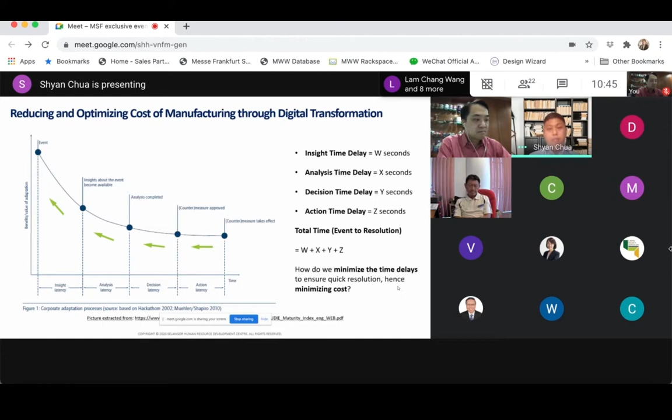Now the key question is, how are you going to integrate from the bottom level, the base, all the way to the ERP? This is a key importance for everyone to understand, because most of the time, what I understood from many industries is they start from the top and then have difficulty connecting to the bottom. So that is one of the challenges that I see.

Most of the time, people start off at the top first. But rather, we should actually look at it from the base level, what you want to achieve, and then slowly move up to the top.

And how that interconnection works is actually through what are the flexible and modular approaches to connect everything together. So we talk about how the smart factory ecosystem should be modular and flexible enough for industries to integrate.

You talk about Lego, right? You start from Lego pieces and then you connect them, and slowly you build them into what we call a masterpiece. The same thing can happen for many industries as well. You start with pieces, connect them together, and once you connect all the way to the top, you build your pyramid, and eventually you have a masterpiece of a smart factory on your own.

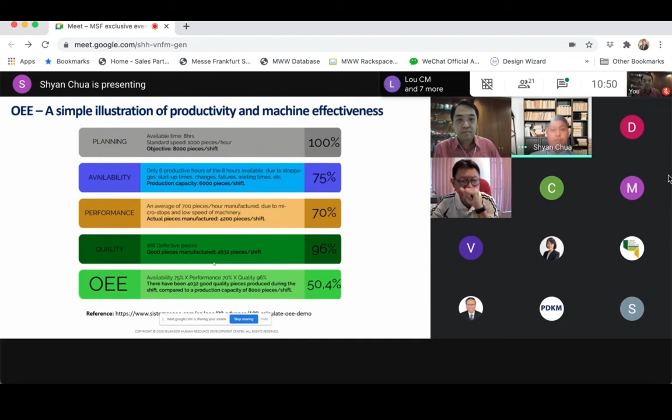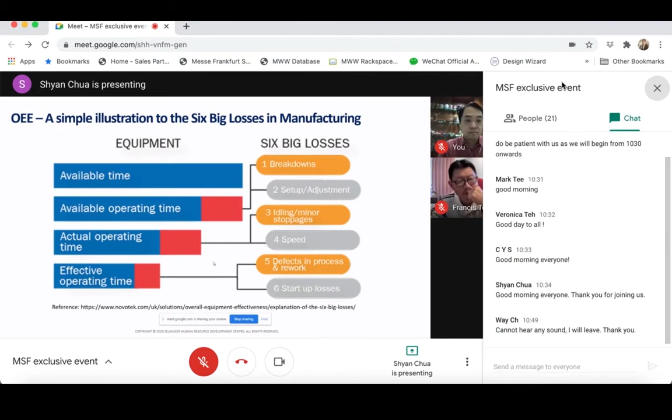So then we talk about the illustration of the 6 big losses in manufacturing. We talk about the 6 big losses, which are breakdowns, setup adjustments, idling or minor stoppages, speed, defects in process and rework. Then you talk about the startup losses and so on. So all these things basically produce what we call your 6 big losses.

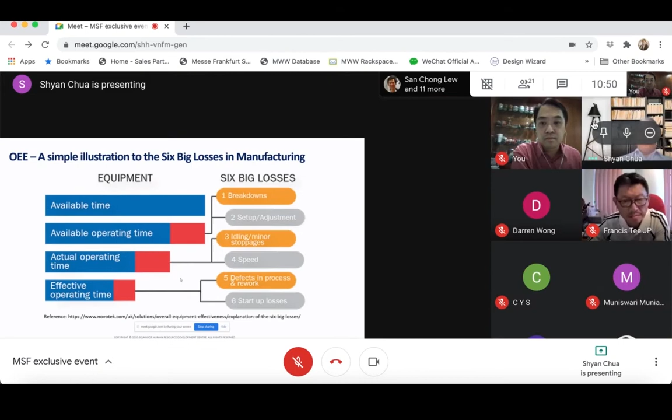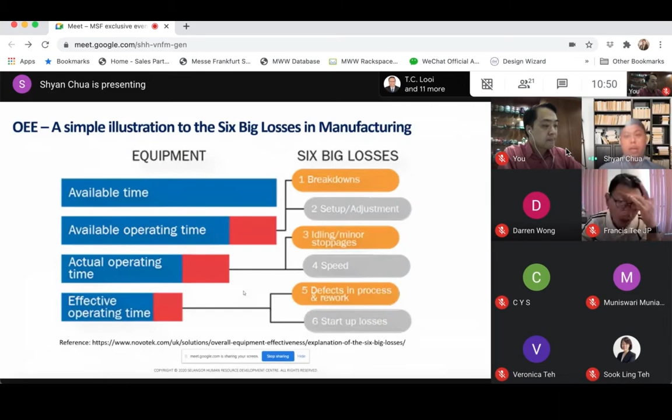And all this identification of your 6 big losses can be achieved from understanding your current manufacturing operations. This can be achieved through getting your data, and then you can actually see where all these losses are at. And then from there, you can identify your unplanned stops, your small stops, your production rejects, and all this can actually be achieved in real time so that you can get the right mitigation steps in place before something bad actually happens.

So now, then we think about the overall OEE. How straightforward can it be to actually be able to collect that kind of information from machines? So most of you would probably have machines with tower lights, with emergency stop, start-stop button. You have sensors that will identify your part in and part out. But maybe these machines are at the moment not connected. So then we talk about how do we then collect the data to actually visualize this kind of information.

So we talk about availability, performance, and quality. From a machine, how do you identify how to get availability data? A simple approach would be tower lights, emergency stop, or start or stop button. You can actually tap signals in a machine to give you that information of your downtime. For example, if you have a red light in your machine, basically your machine is down. So then you can calculate your downtime, and once you calculate your downtime, you can calculate your overall availability.

So then you talk about your performance, which means your part in to part out, which is your cycle time, your process cycle time. So you just have to tap signals from input to output - how many cycles your machine has run, and what's the time difference between cycles. That is your overall performance.

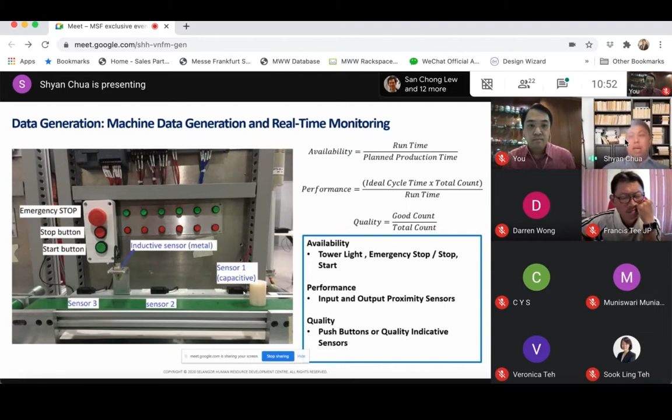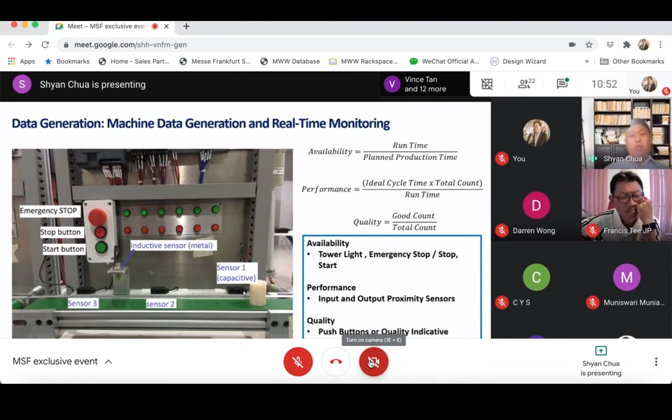Is it either operator dependent, or machine dependent, or is the startup time taking too long? Then we are able to identify, right? We can take action almost immediately because this is real-time data.

Then we talk about performance. Let's say my performance has dropped to 50%, halfway through my production shift. Then I can understand that my production is having this issue because maybe my conveyor belt has a problem, or maybe my system has a problem, my hydraulic press has a problem, maybe, right?

All these things we need to identify through data collection. Then we talk about quality. Let's say operator A, in his shift, his quality is 90%. Operator B, his shift, the quality dropped to 50%. So this kind of quality issue can be operator dependent. Or let's say today you use raw material from company A, and you achieve 90% quality. Tomorrow you use raw material from company B, suddenly your quality dropped to 50%. Now that is basically quality dependent on raw materials.

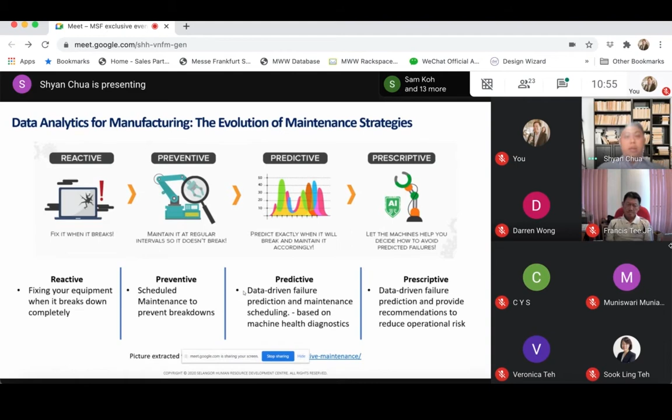Now, the whole idea of data is basically helping you to make decisions early before it actually reaches a functional failure. By having operational technologies in place, you can monitor your machine health over time, so that you prevent it from only mitigating the steps at the functional failure stage, but you're actually able to solve it preventively at the early stage, through the predictive maintenance kind of strategy.

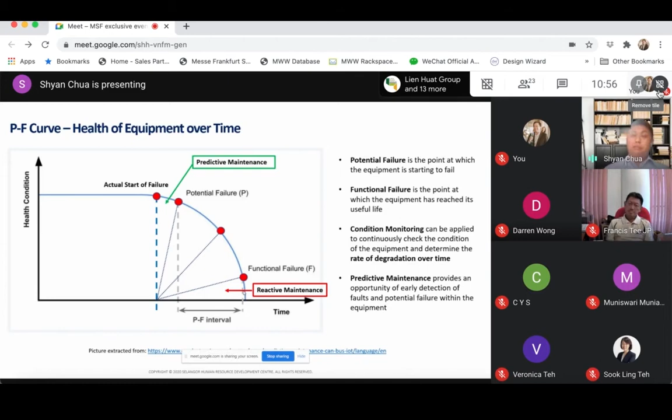And these are data-driven strategies to help you make decisions faster. If, by data, you can understand the machine better and understand the root cause, you make decisions faster. Therefore, you get your machine up at a faster rate.

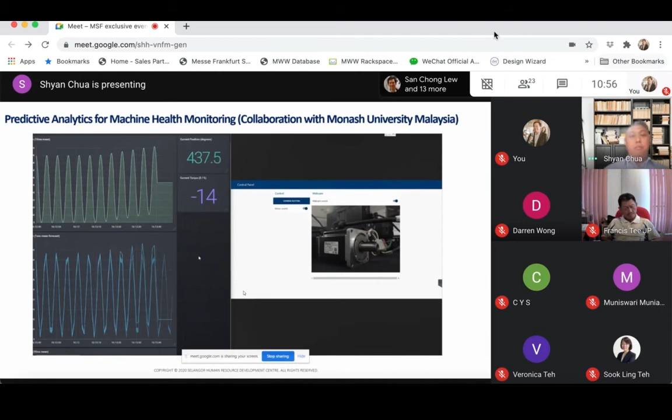So when you have a lot of data, you can also identify what is happening in your machine. We talk about anomaly detection. Sometimes when your conveyor is having a problem, eventually you can predict this faster. Or let's say if you have a certain oil leak in your oil tank for your hydraulic press machine, you are able to understand what is the level of the oil, when to actually change or top up your oil. So these are what we call anomaly detection.

So the whole key idea about operational technologies is how do you integrate these technologies to give you the data that you need. It's not just any data, it's about the volume of data, how big you want your data to be; velocity, which is your frequency—it cannot be every 1 to 2 days you collect data, it needs to be a certain time scale depending on your system; and variety—you don't just collect one signal, you collect many.

And then veracity, which is your accuracy of data. Now, accuracy of data is very important, because sometimes people say, oh, I have a supervisor that every morning will collect data from 40 over machines. What is the data accuracy of that data collection? Does anyone know?

If there is some tampering or non-transparency in the data collected, we will never know. So automating data collection will create value and useful data for management to observe, and by doing this you actually reduce your total losses.

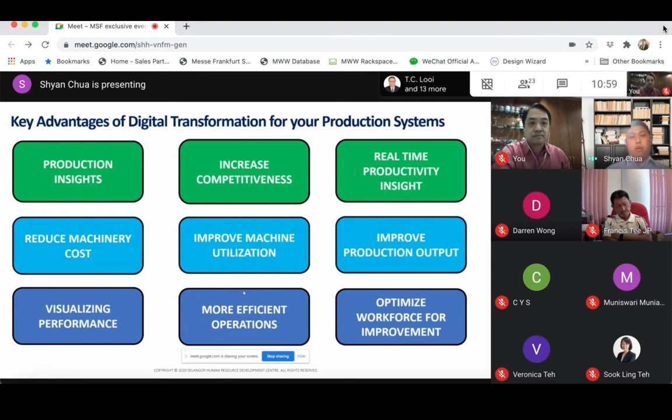Right now, if it's an MCO or CMCO, we can visualize it from our home. Your management can actually see the data from anywhere they are. That is the kind of transparency we want to achieve eventually to help many industries move forward.

So understanding the value creation of digital transformation helps move many industries in the right direction, and the more sustainable and cost-effective approach is looking at building your transformation roadmap with a more people-focused strategy.

You don't need to do an entire company approach of Industry 4.0. You can start with small projects, get the team involved, get the people involved, build them up to become what we call ambassadors of the company.

You would not want to implement technologies and have them become a white elephant in the company, where nobody uses them. You want them to cultivate the culture of, yes, technology is going to help me get this information and make me more productive. So that's talking about ambassadors.

Then you build domain expertise, which means you have your internal team to support you. Having an internal team helps improve your overall utilization because you already have an internal team standby to support your entire production system.

Then you talk about continuous improvement, and I think most industries will always talk about Kaizen, continuous improvement to scale up your operations. So it's not a direct plug and play kind of technology, because eventually the idea is you can continuously improve this to scale up.

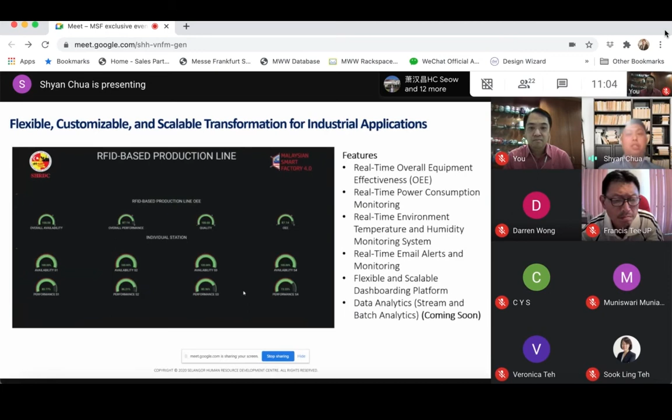So whatever dashboard that I showed you just now, you can actually scale up further. You can build your own cost-effective and sustainable platforms like this, monitoring not a single machine but multiple machines. It is up to you. Basically the whole idea of integration is how do we connect them together in a more cost-effective and flexible manner, so you can monitor your entire operations, and once you are ready, you can scale up. You can look at different parameters—power, temperature, humidity, it's your choice. Eventually, what we provide to support industries is the competencies required to develop these kinds of technologies, and then you can learn, build it on your own, and scale up.

Then after you collect data, you talk about visualizing and storing—that's level 2 and level 3. Then you talk about building your own OEE, that's level 4. Then only you move up to analytics. So all these are actually capable to be taught, and we can teach you exactly how to do this kind of integration through our programs.

So we have all the way from level 0.5, which is actually this OT topic, part of level 0.5, scaled down for this webinar. But we go deeper into the technical overview in this program. Then we talk about level 1, level 2, level 3, level 4, level 5 in different programs that we have. So all these are available for any participants who want to start their transformation journey. We can help you from here.

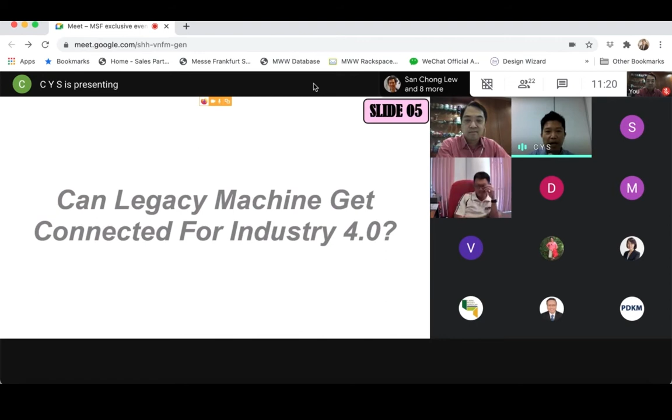Now we're at slide 6. I think Bosch has shown a very good example earlier. They took out one machine, a so-called antique machine - to be exact, a cast iron workbench they used to wind coils for a starter motor. In 2017, they took out the machine and turned it into an Industry 4.0 ready machine. Now they can track in real time the RPM for the motor, and also track in real time the condition of the aging leather drive. So once again, this shows that legacy machines can easily get connected to get the data we want.

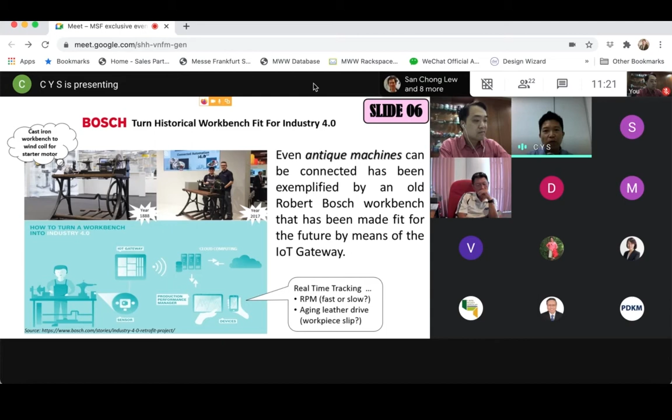I think that's all from my side. Thank you.

I would like to give a quick overview of what Dr. Chua and James shared earlier, which is very much focused on people, not just technology first. If you want to implement a smart factory in your office, basically you should focus on your people as well, which means talent development is very, very important. It's good to hear that in APM, the project you're working on also focuses on talent development. This is actually very interesting because a lot of people may not think that way, but people may want to work with other people or with other system integrators as well.

I'm very curious - just now when James shared something on the Grafana dashboard, I understand you worked with SHRDC as well to implement this, what we call the Lighthouse project, Dr. Chua. Out of curiosity, did you involve any other system integrators in between, or was it just between the two of you, between these two organizations only?

Actually, it was just between APM and SHRDC only. Okay, alright, good, just the two.

Was there any reason why you didn't use a system integrator, or did you just decide not to use one? For this project at this moment, I think this was just enough, because the skill we intend to build into the plant - we learned the skill from Dr. Chua's team, and subsequently we're able to do it ourselves already. In fact, this year we plan to Yokoten, so-called copy this technology to another 3 lines by ourselves, 100%. So everything is in-house - at the moment, it's in-house.

I would say not 100% not accurate, I mean it's not fully accurate as what we expected. Because once we take the signals in real time, we can compare with the manual data, and actually there is some gap there. There is potential improvement for us.

So if you ask me what do I wish someone had told me before I started information automation, I wish someone told me that you need to start information automation first. That's why today I share with all of you, Industry 4.0, I conclude you need to do information automation first. Get the data first.

Interesting, James, thanks. Actually very odd though, because a lot of people, if you follow the industry guys, they will say 1.0, 2.0, 3.0, then only 4.0. But for you guys, you started with 4.0 first, in some aspects.

Correct, interesting. Now I think there's another question from Mark, asking if the system is able to integrate with an SAP system. But I want to expand on that rather than just saying SAP. Maybe for Dr. Chua or James, can we consider not just SAP but all kinds of ERP systems out there? Is it possible to integrate all these systems within the Node-RED program, or how are you looking at it?

I think Dr. Chua is a better person to answer this. Yeah, no problem, James.

With regards to SAP, yes, we have scoped out that there is a connection or plugin towards SAP systems. This is something the company can explore if they intend to look into integration, because every ERP or MES system always works on a back end database. So as long as the Node-RED platform can access the back end database, your data is already collected there. This is how we visualize that kind of integration. We believe it's capable, but we can try it on our own or with you first to see that capability. We are open to discuss how we can do that.

As mentioned earlier, Master Worldwide and SHRDC are sales partners - we partner together to sell these courses. We are their sales partner, and SHRDC is the training partner. Both these courses take place every month, and of course they are held virtually as well.

Now your first question may be, would it be better to go for data generation first, or should I go for the smart factory technical overview first? It depends very much on the individual company. One of our clients recently signed up for data generation because he knew he wanted data generation in his factory, similar to what James did as well - they just jumped on the bandwagon of data generation. But having said that, it doesn't necessarily mean that it's right or wrong.

So basically, in short, if you want to know a bit more about smart factory - especially if you're an engineer and want your bosses to buy into this - then there's the smart factory technical overview course. There's a course involved as well. Then there's the data generation course too, which takes place monthly.